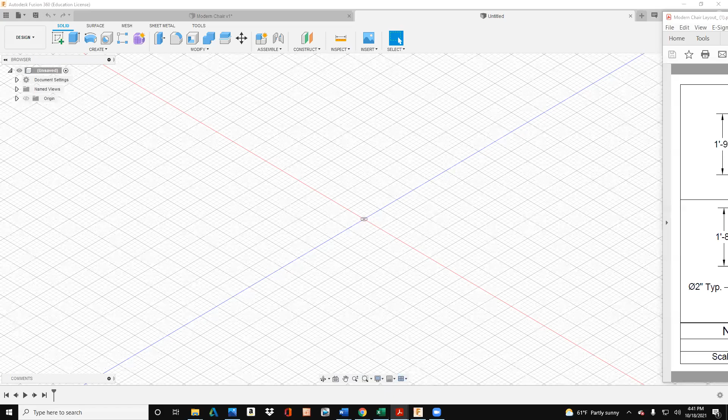All right, so looking at this drawing here, I'm going to start with these legs, which are 2 inches in diameter and they're 18 inches tall. So what I'll do then is...

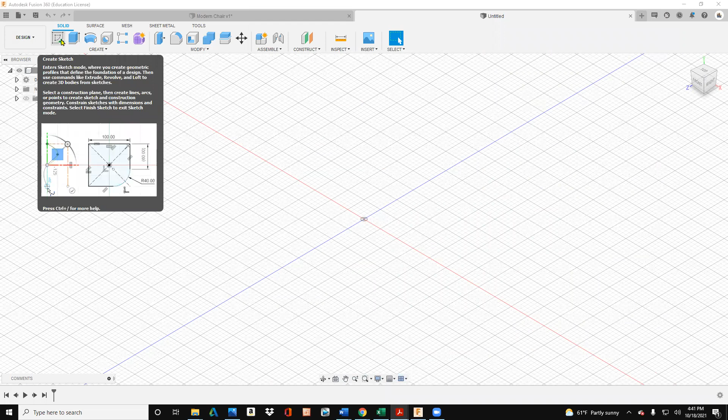Open my Fusion, I'm going to be in design and I'll select create sketch. All right, there it is. All I want to do is select, I'm on the top, I just want to select the bottom. Then with my mouse, I just want to be on the top view. I'm going to draw a circle and type in 2. All right, that's the diameter. And so there it is.

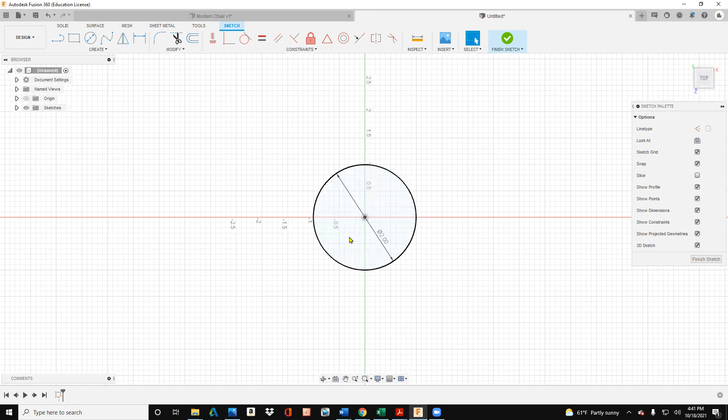So I've got 1. Now, looking at my drawing, the next leg here is... I got to do the math, Elaine. I hate doing the math here. So the whole thing is 12 plus 9, so we got 21. And so I minus an inch inside it, so it's 19 inches, I think, from the center of the leg. Yeah, that's 19 inches.

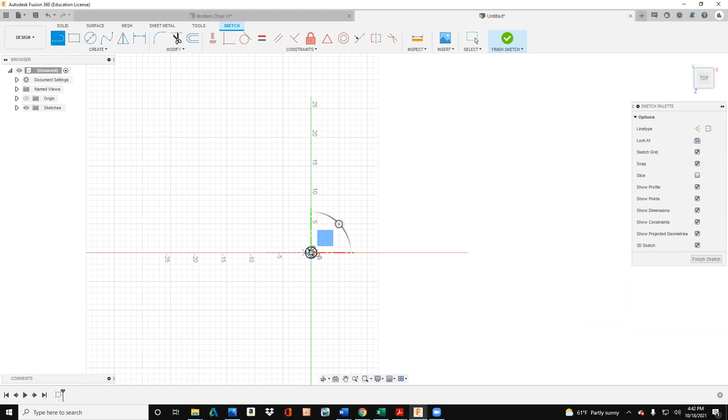So what I'm going to do then is take a line and just type in 19 and push enter. This is going to be like a template, so I'll make another leg here. I'll type in 2. This is honestly the hardest thing here, just figuring out all the space.

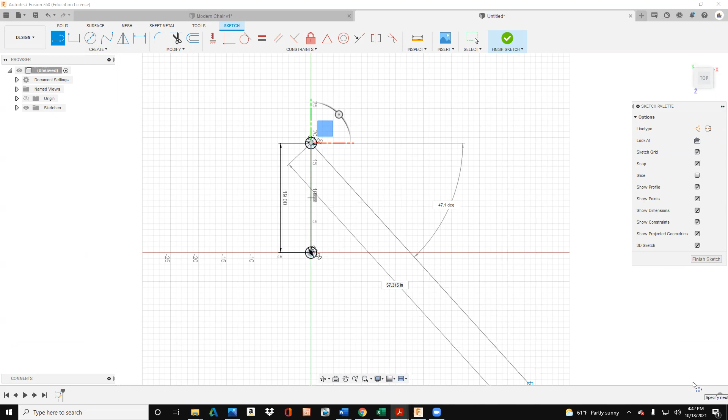And then the back of this chair, we said, is... sorry, come on. Back of the chair total is 18 inches, so 18 minus 2 is 16 inches. So I'll come over here, 16 inches. Hopefully this is right, type in 16, come on.

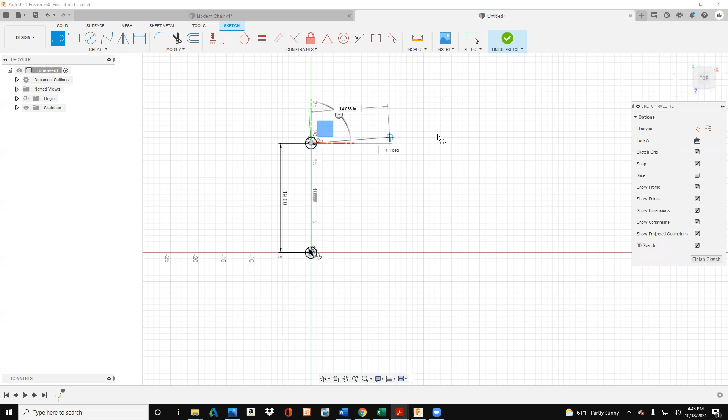Okay, and then I'll come down. I think it's supposed to be 18. Is it 18? So 12 plus, the whole thing is 18, right? 12 plus 6 is 18, and then I add 1 inch and 1 inch. It is 16, yeah, it's 16, I think I'm good. All right, so then I'm going to make another leg here.

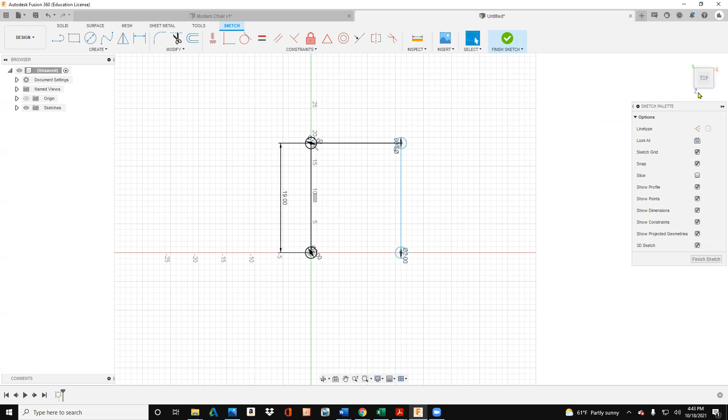I'll type in 2. That's not a leg, it's just a circle. Type in 2, enter. And so let's look at this in 3D, what we have here.

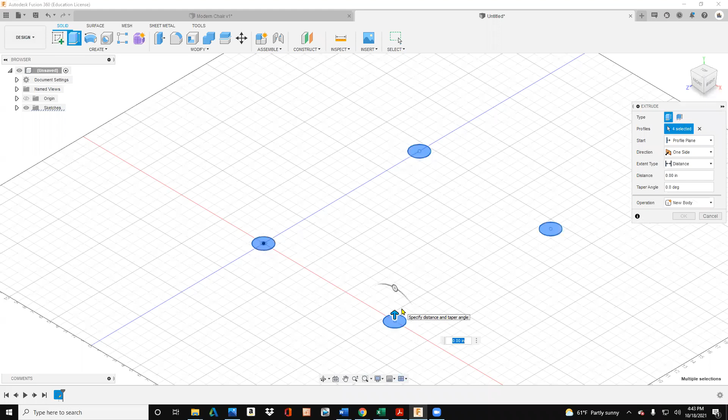So now what I'm going to do is get rid of these lines, I don't need them, and just extrude these legs. I'll say finish, I'll go extrude, I'll select 1, 2, 3, 4, and I'll type in, I think we said the legs are 18 inches tall. I'll type in 18, make sure it says new body, and push OK. And so there are my legs.

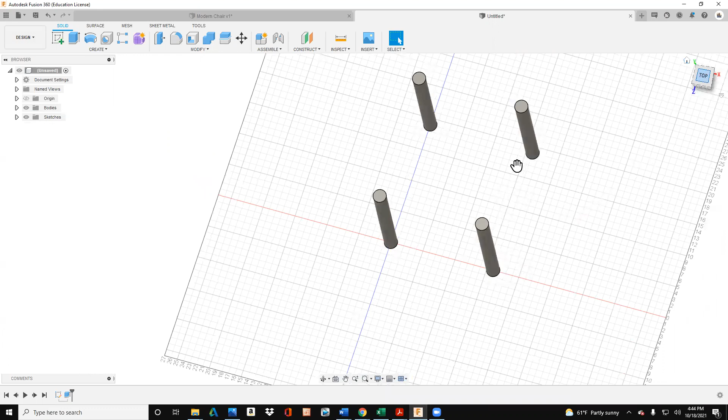All right, so now what I need to do, I made 4 legs, I just need to make the seat and the back. I'm going to follow a very similar method. So I'll go to the top view here, and I'm going to make a chair. The back seat is actually, I should have done a better job on this CAD.

This is, there's a 1 inch back there. So the whole thing is 12 plus 8 is 20 inches, because there's a 1 inch back, if you look. So it's 20 inches by 18 inches.

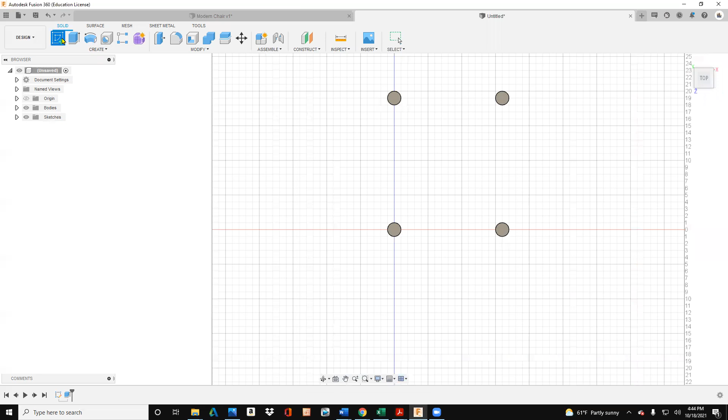So I'm going to make a rectangle here, I'll do the same thing. I'll just select this as my plane and I can actually just eyeball it, I don't even need to... 18, let me look at my, is that right here? Yeah, so that's right, so just like that.

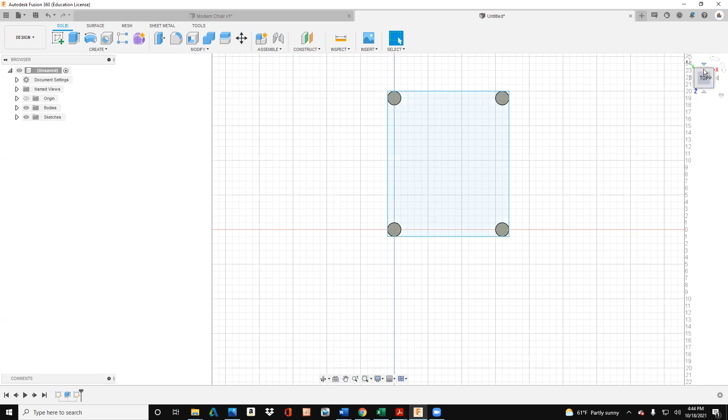All right, and I'll say finish sketch. And now I'll go into 3D. I'll click that home and I'll hit extrude, select this, and I'm gonna go up, new body. I type in 1, make sure it says new body, defaults. All right, say okay. All right, so there's my seat.

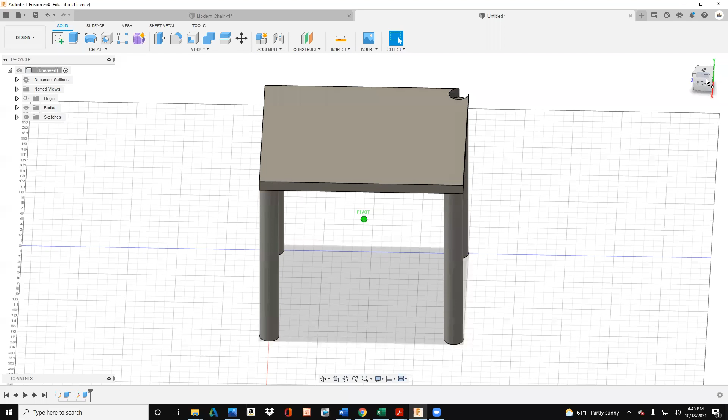And now I just need to make the back. So I'll actually go to the back view here on this cube. You got a cut there. Yeah, I don't, Elena, you weren't supposed to see that. All right, why did that happen? Let's try that again. Yeah, so Elena, why is that happening?

Let's turn these chairs... interesting that did it. Let's just turn those bodies off. I'll extrude this 1 inch.

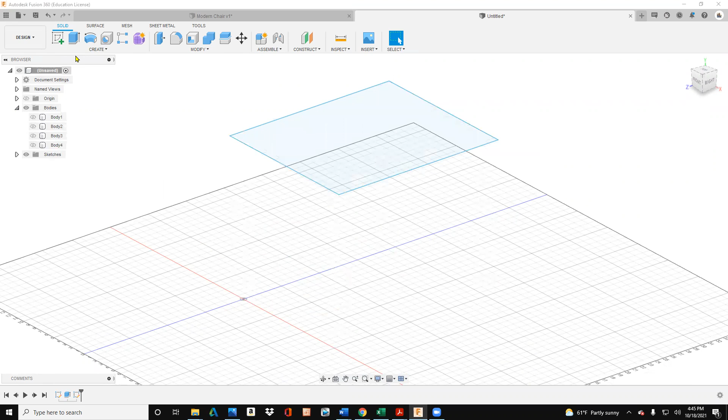Why is that still there? Elena, why is that happening? When you selected the plane, it kind of just shaped it. Okay, so I think I can still do it. Usually I just, I think we got it.

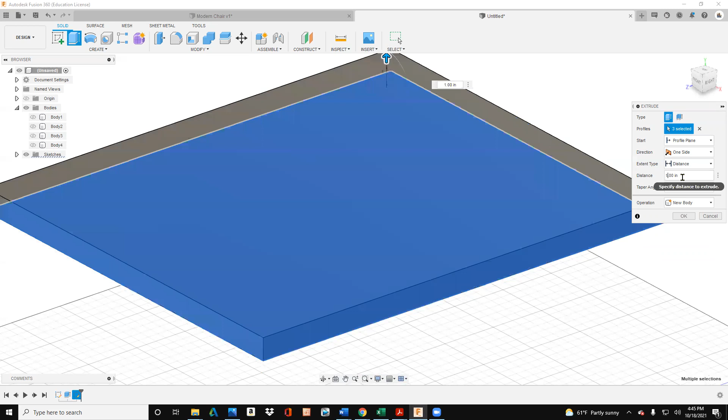New body, okay, let's turn those. The other thing I can do is just type in leg here, leg one, and it'll go ahead and number them. And then I'll do body 5 here.

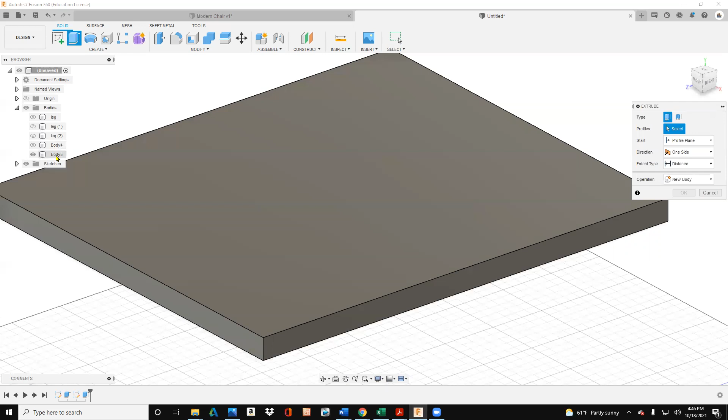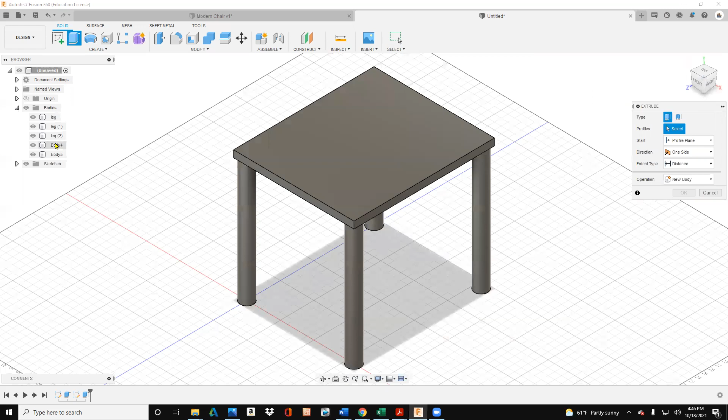All right, let's see. Okay, so let's go and I'll do the back. All right, so that worked. Come on, let me change the name here. Lena, why is it not letting me change the name of this? Oh, there it is, I was trying to change extrude. There we go. All right, so leg, and then I'll type in seat.

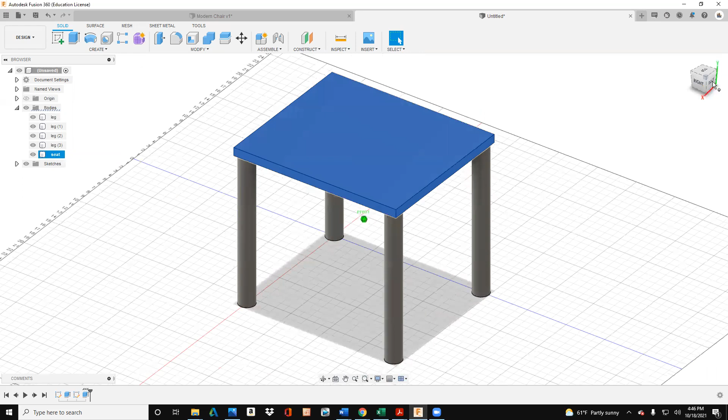Bear with me, everybody. Okay, now I'll go to the back view here, and I'm going to make the back of this chair. So the back of the chair, the dimensions, look at this back here, so it's going to be 12 plus 8 is 20 by 18 inches.

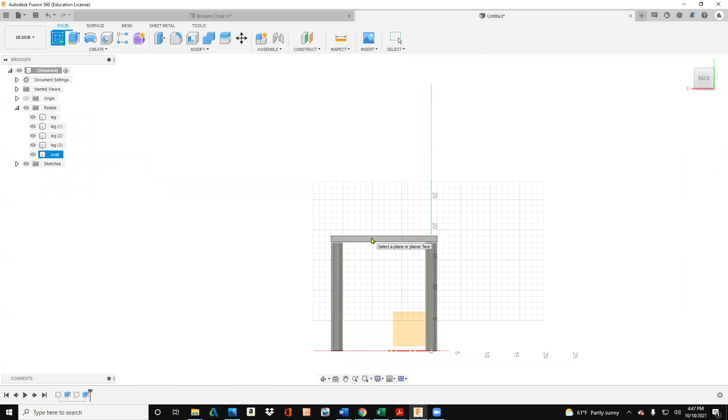So I will go ahead and do the same thing I did last time. I'm going to select my rectangle tool here, select the back of this chair, and then go ahead, should be, we said 20. There it is, finished sketch.

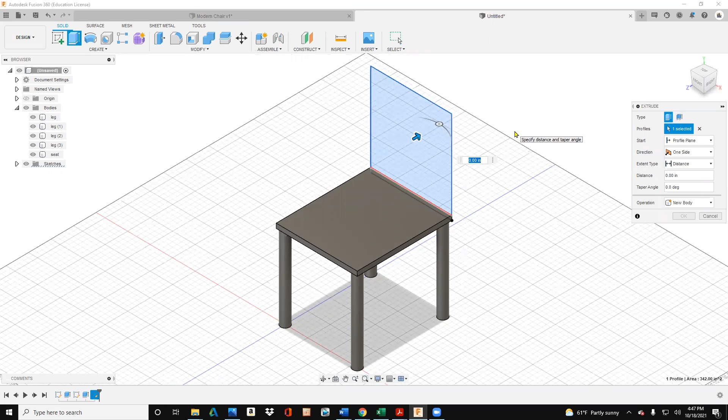Let's look at it in 3D. And now I'm going to extrude it. So select and I'll extrude it 1 inch. Make sure it says new body and say okay.

Lena, I wanted that to be down. Why didn't that go down all the way? You got to select all the shapes. All right, why didn't that go down all the way? I thought I did that right.

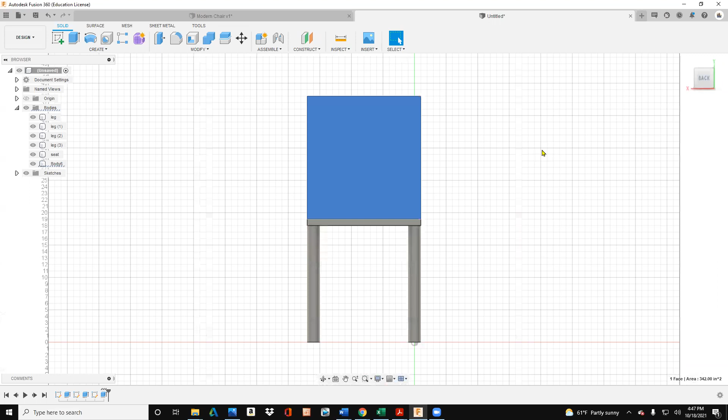From the back view here, let's just move it down. So I'll go here, if you need to move it, I'll type this back. All right, if I want to move it, I can right click on it and say move, and I just want to move it down. So I'll grab the arrow. I can actually type in Y, I could either type in Y -1. There it is, all right, or I could just drag it down.

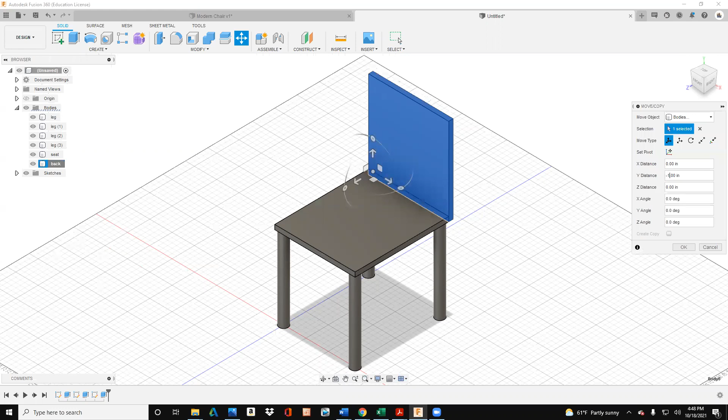So now the last thing to do on this is I'm going to put a little hole in there. Anybody want to guess why the hole is in the chair? It's so you can move it. Think of a restaurant where they want to grab and move these chairs, so you just grab the back of the hole.

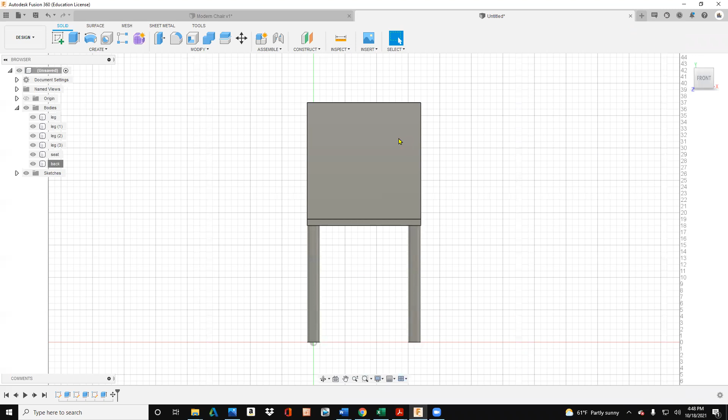So now what I'm going to do, I don't think my drawing shows it, but I'm going to find the set. I'm going to go to the line tool here, find the center of the back, it'll snap to it, and go down 4 inches. And then what I'm going to do is make a circle there, that's 4 inches in diameter. Type in 4, and then I'll say finish sketch.

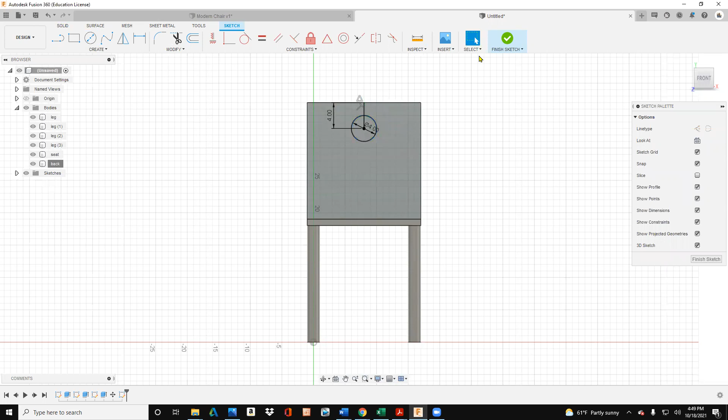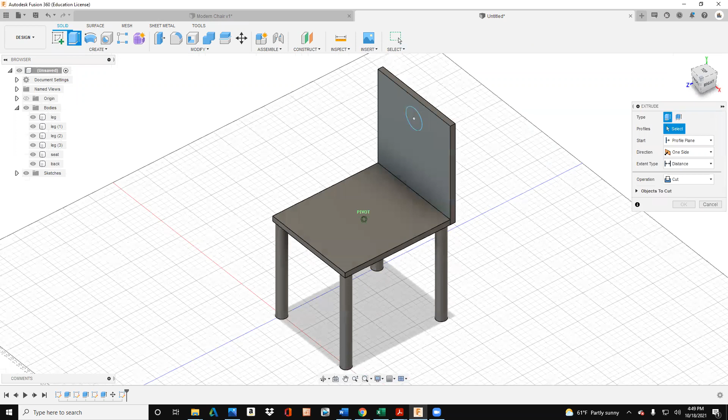I'll go in my 3D, and what I'm going to do is cut that hole out. So I don't need that line here, and I'll select that line. I'll do the same thing, extrude, this time I want to do the cut. I'll select this here, and the distance will be, it doesn't really matter, just as long as it goes through it, I'll say okay. And voila, I have finished the CAD portion of this.

So now what I want to do is go to the render, and I select my appearance, and you can do whatever you want. I'm going to go ahead and in my appearance select wood. There's wood here, there's usually a lot of woods, there's wood solid, I haven't really, you can play around with this. Finished, let's try mahogany glossy. You just kind of have to play around with these things. And why is it not showing up?

Let's try a different one. You got to download it first if you haven't used it before. Oh, see the arrows, thank you.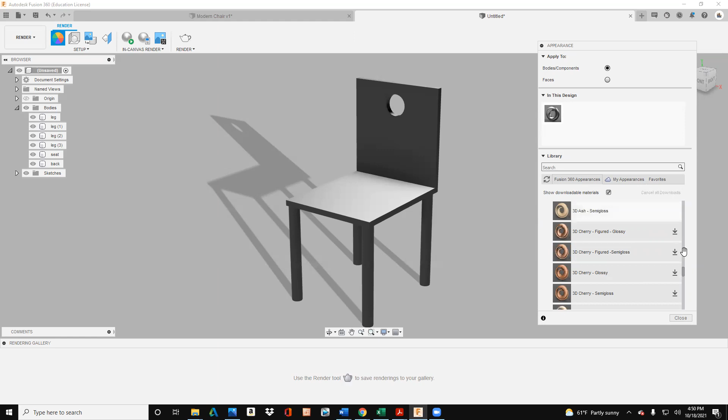Let's just do a 3D render. I'll do the ash, let's see what that looks like. So there it is, I think it should go automatically. Is that right? There it goes.

It must be downloading because it's not really super high quality. I already did the chrome. So if you want to get metal, I did chrome here and I just selected the chrome and then drag it onto the legs. And that's really the extent of it for this exercise.

So then what I do is I can make an environment or I can render it like this. So I can create a scene. When you go create a scene, you want to make sure that in the settings, you select out of the solid and say environment. And then when I render it, I can pick any option, obviously I probably want to do something indoors.

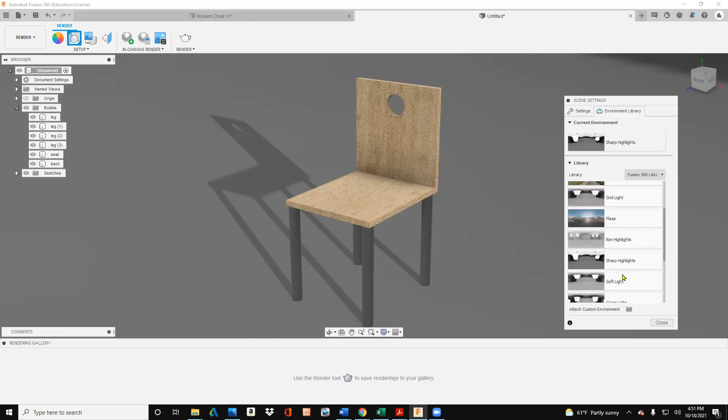So I could pick, you just kind of play around with it. I'll do some sort of a grid light. I don't really know what that's going to look like. There it is. And then I'll go ahead and render it.

So you go to the teapot here, I want to render it. You should save it first, so let's go ahead and save this. I'll save this as modern chair.

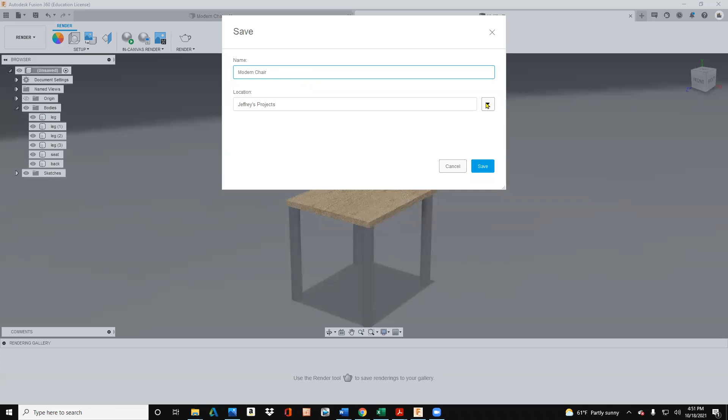Remember, this is all in the cloud so that if you want to access it later, I'll put it in—I think I probably have a modern chair right there, save. And now we're going to render it. The thing about rendering is you don't want to do the cloud, because you have to in theory pay for it, even though as students you get it for free.

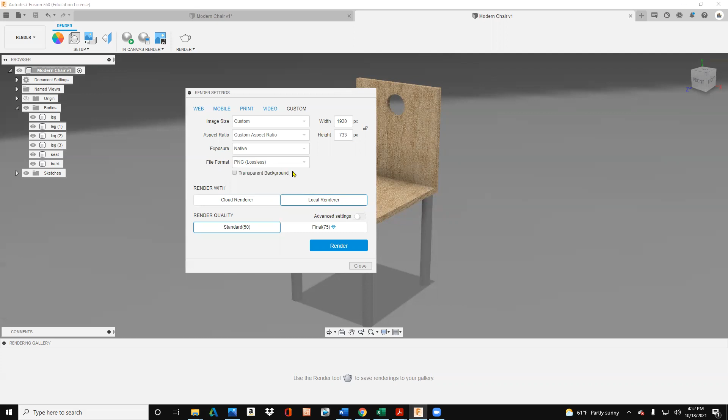I can do a standard and that's probably fine. You'll notice that it's either PNG, JPEG, or TIFF. TIFF is kind of old school. And then I'll render it and I'm done.

So let's go render it. It'll show us rendering at the bottom. It takes a couple moments. I click on this and it'll come up, and then this is what I will download.

And that's what I will do for the grade. So I know that was really rather quick on my end. So when it's done though, let's go ahead and do this all the way through. It should appear, I think it's good, process.

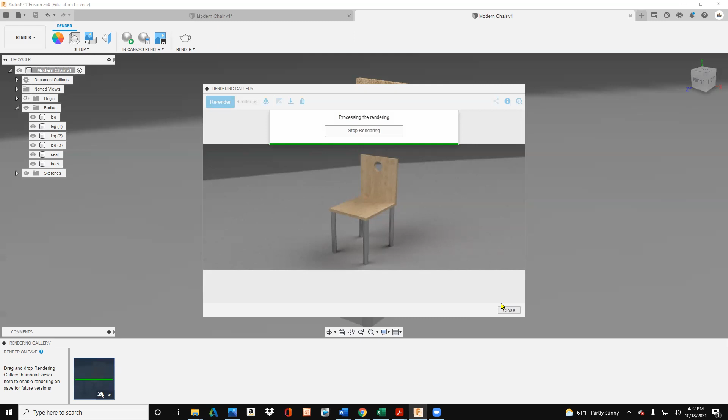So it's still processing. Again, when you do renderings, there's never enough time. All right, so I probably want to crop that—that's really weird—but then I download it, put it where you want. So I'd say modern chair.

And then remember, if you want to add your own logos, I encourage you to do it. So I'm going to just put this in here for now. If you want to add logos, it's not required, but the way you would do that is you would go into your...

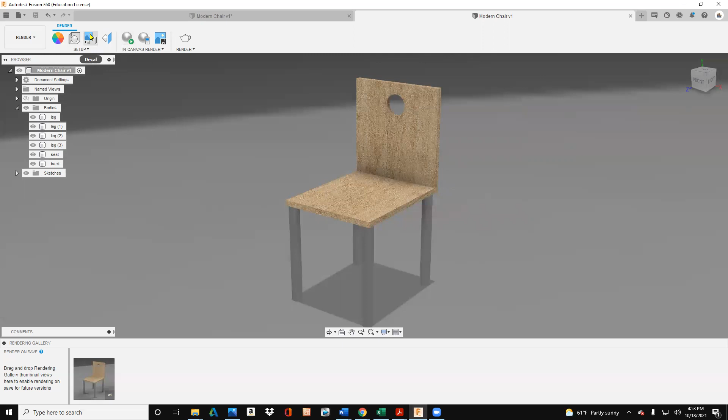Let's see, where would I do decal? And then I would go ahead and insert it from my computer. So you want to do the PNG. These are, I think, I built these with your class.

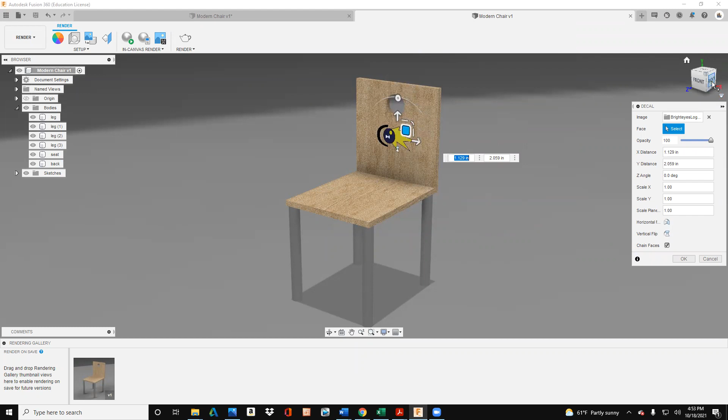I'd say open, select where I want to put it. I'll put it in the back here, and you can—so it's not required you add your logos, but if you want... now it's kind of weird how it's coming out the back too. And so I go there, I'd say okay, chain faces—I don't know what that means.

Elena, do you know what that means? Chain faces? Not sure. Okay, and so there it is.

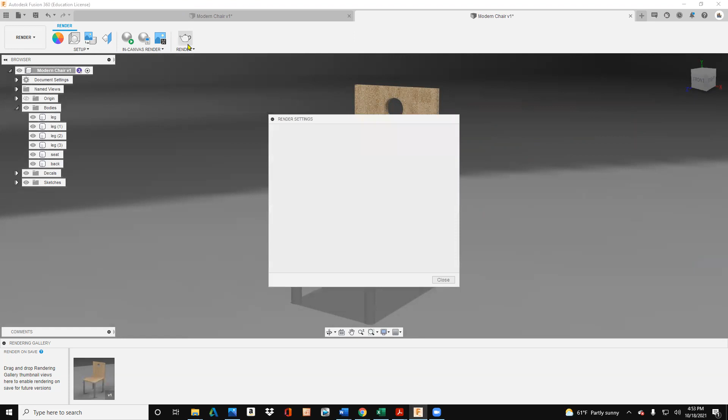It's good, now I can re-render that if I want. I encourage you to add your logos, it's not required. I'd re-render it, and you can play around with different sizes.

And again, we're not going to do any animations, but you can also do animations if you want. Maybe—we're offering this as a class in the fall, Fusion 360.

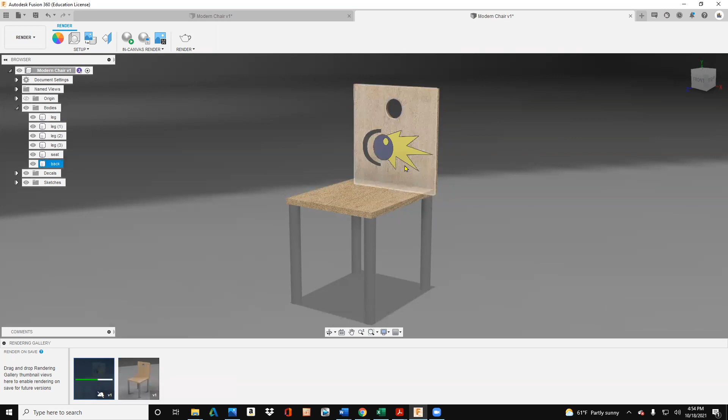So I would save this and upload it. I probably wouldn't have that rendering—I'm not really, that logo looks a little silly. So I probably want to just use the initial rendering. Okay, so I'm going to go ahead and stop the recording.